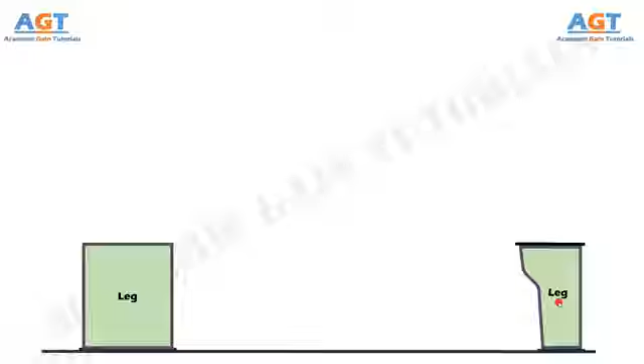This is used in holding the lathe machine and in elevating the lathe bed to a working height. Legs are the most bottom portion and carry the entire load of a lathe machine tool. The legs are firmly secured to the floor by the foundation bolt.

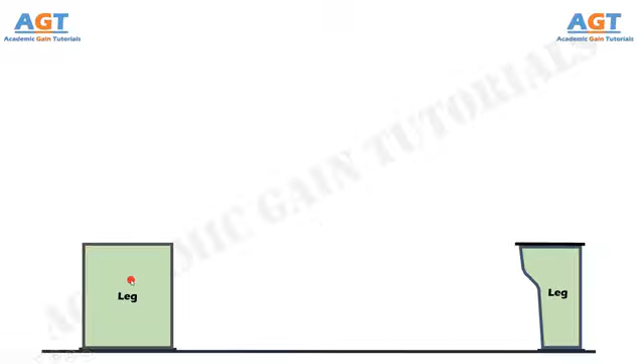The legs or stand of a lathe machine are made of cast iron, through the casting process. Since cast iron has a high shock absorbance and wear resistance capacity, it helps the legs absorb the vibration during work and transfer it to the ground.

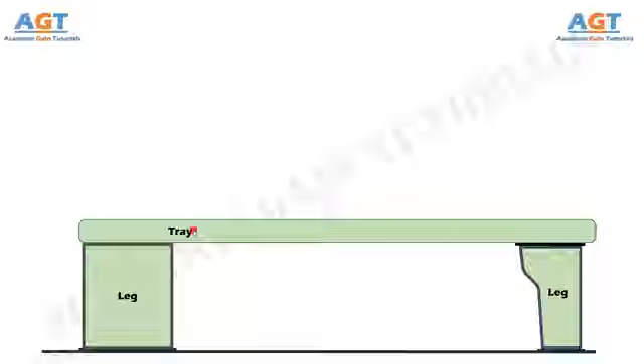Above the legs, there is a tray, also known as chip pan. It is placed at the lower side of the bed, above the leg of the lathe machine. The main function of the chip pan or tray is to collect all hot chips removed from the workpiece during machining operation.

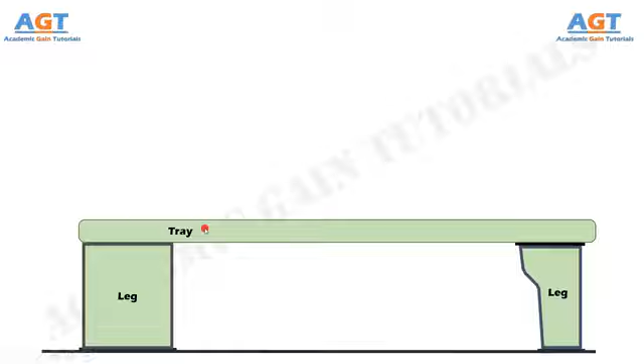Above the tray, there is the bed of the lathe machine, also called the lathe bed. The bed of a lathe machine is the base on which all other parts of the lathe are mounted. It is a massive and rigid single-piece casting made to support other active parts of the lathe machine.

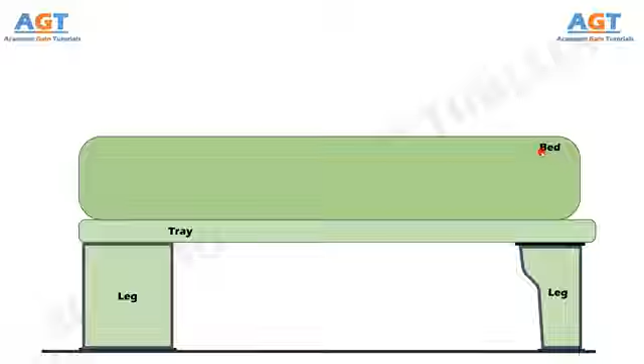The bed is chosen according to lathe machine specification and requirement. It is usually made by single-piece casting of semi-steel or chilled cast iron due to its high compressive strength, shock absorbance, and high lubrication quality. If we are making a larger lathe machine, then 2 or 3 pieces of the bed are cast and then bolted together. For comparatively smaller general-purpose lathes, the lathe bed is made through single-piece casting at a time.

There are guideways on the lathe bed. These guideways take care of the movement of the tailstock and carriage on the bed.

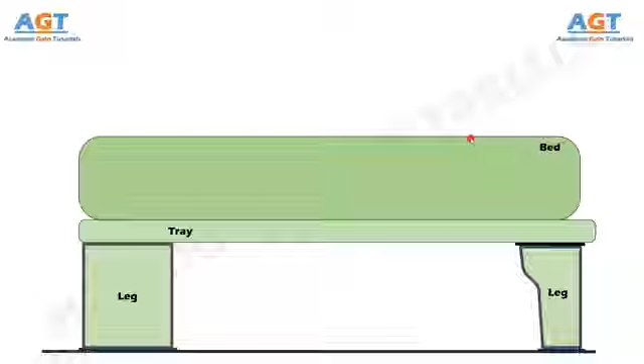On the bed, there is the feed box. This feed box is connected to the lead screw and the feed rod. The lead screw is an externally threaded shaft or rod. It converts rotational motion to linear motion and is used for thread cutting operation in a lathe machine tool, moving the carriage automatically during thread cutting.

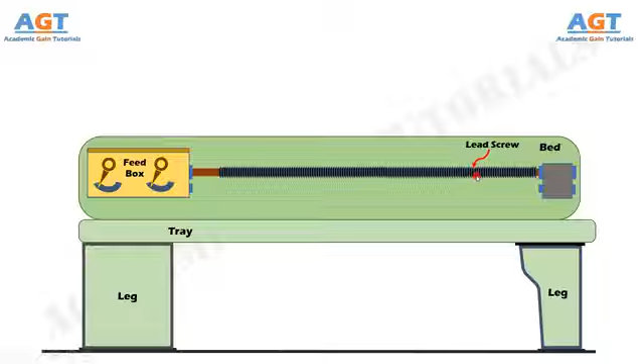The feed rod is a cylindrical rod. It does not have any thread on its external surface. This feed rod is used to move the carriage from the left side to the right side and also from the right side to the left side.

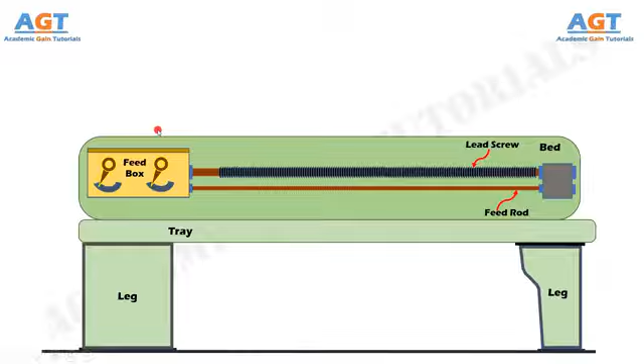Now, on the left end of the bed, the headstock of the lathe machine is located, while on the right side the tailstock is located. The headstock is situated at the left side of the lathe bed and it is the house of the driving mechanism and electrical mechanism of a lathe machine tool. Headstock transmits power from the spindle to the feed rod, lead screw, and thread cutting mechanism.

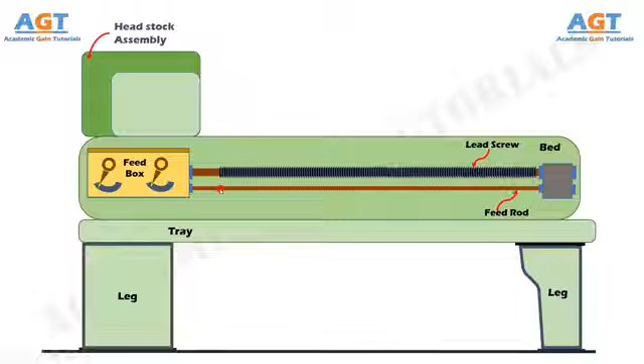There are speed selectors for controlling gear speed. And here we have a lever called the driving clutch, which is used to engage and disengage the spindle from the gear mechanism inside the headstock. In other words, it engages and disengages the motion.

At the starting of the lathe, this driving clutch keeps the motion disengaged from the spindle, and when needed we can use this clutch to engage the spindle with gears for motion, and the spindle starts rotating.

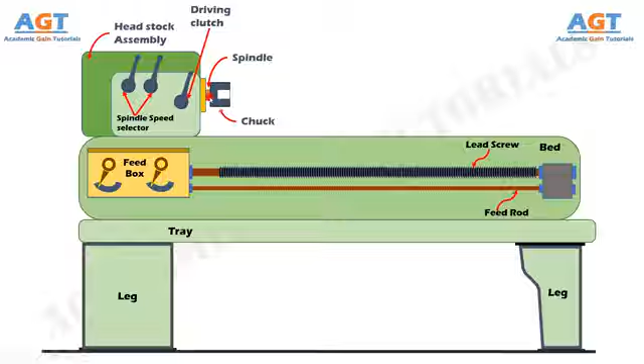Here this is the spindle connected to the headstock. The spindle possesses a live center to which the workpiece can be attached. There is a hole throughout the spindle for handling long bars of workpiece. The spindle is hollow inside and has threads cut on the external surface.

On the other hand, the chuck has threads cut on the internal diameter. So the external thread on the spindle surface and internal thread of the chuck result in coupling or fitting of the chuck with the spindle, just like nut and bolt. After mounting properly, the chuck and the spindle become an assembly.

The chuck here is used to hold the job, or workpiece, firmly during the machining operation. As we have just discussed, it is mounted on the spindle which rotates the chuck and workpiece. Depending on requirements, we usually use 2 types of chuck.

3-jaw chuck, and 4-jaw chuck. The 3-jaw chuck is also called universal chuck, because the three jaws move simultaneously when any one jaw is adjusted. These three-jaw chucks are generally used to hold cylindrical jobs.

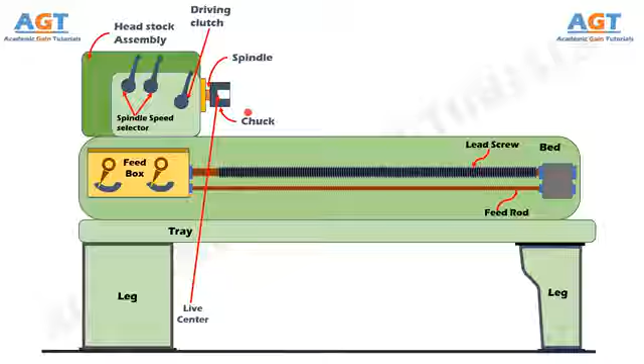The four-jaw chuck is also called independent chuck, because in a four-jaw chuck each stepped jaw is independently operated by a different screw. So the four-jaw chuck can also hold square jobs, rather than cylindrical.

The tailstock is situated on the right side above the lathe bed. It is made out of cast iron. The tailstock moves on the guideways on the bed surface, and it can be moved forward and backward, towards and away from the chuck, according to requirement and job length.

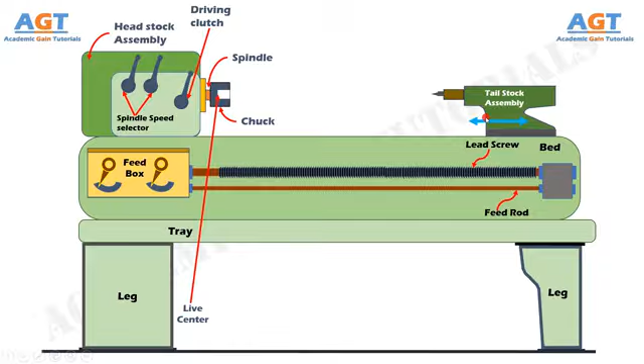The tailstock is used for supporting the long end of the job for holding and minimizes its vibration and sagging, so that the long workpiece does not deflect or bend during the machining operation. It holds the tool for performing different operations like drilling, reaming, tapping, etc., and it is also used for a small amount of taper for a long job by offsetting the tailstock.

This tip portion of the tailstock is also called the dead center, because it just provides support, and no motion is provided to this point. On this side, we provide motion to the spindle, which in turn rotates the chuck and workpiece, so this is called the live center. Both live and dead centers have 60 degree conical points to fit center holes in the circular job, the other end tapering to allow for good fitting into the spindles.

The dead center can be mounted in ball bearing so that it rotates with the job, avoiding friction of the job with the dead center, as it is important to hold heavy jobs.

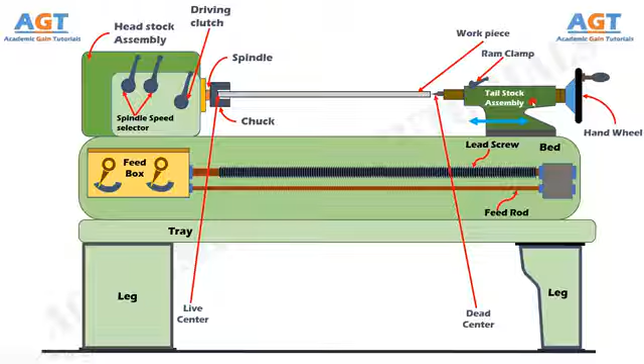In the tailstock assembly we also have the ram clamp and the hand wheel. When we rotate this hand traversing wheel, the dead center moves back and forth, that is, in and out. The ram clamp is used to apply lock on this movement, so it locks the dead center in the tailstock so it does not move.

In addition to this, there is also a tailstock lock, which is used for locking the tailstock firmly in place according to our requirement during machining operation.

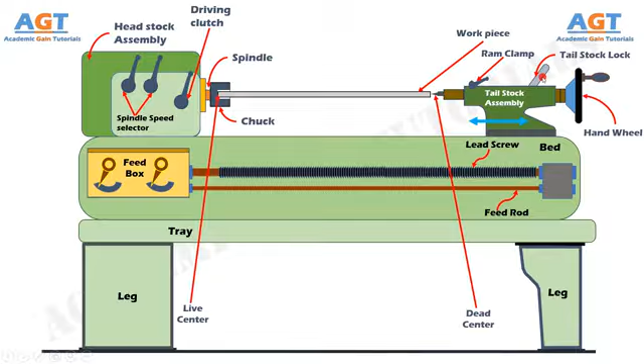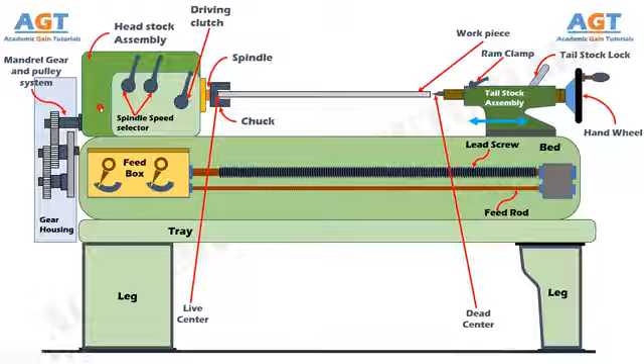On the left of the headstock, there is the main driving pulley and gear system. This driving pulley system is connected to the gearbox inside the headstock, and this driving pulley is connected to the motor through a belt.

Then comes the carriage. The carriage is used for support, guide and feed the tool against the job when the machining is done. The carriage holds, moves and controls the cutting tool, and gives rigid support to the tool during operations.

It transfers power from the feed rod to the cutting tool through apron mechanism for longitudinal and cross feeding. The carriage simplifies the thread cutting operation with the help of the lead screw and half nut mechanism. The carriage is formed of 5 parts: saddle, cross slide, compound rest, tool post, and apron.

On the carriage there is a hand traversing wheel. Using this wheel we can move the carriage left or right, along the feed rod and lead screw. There is also a half nut, or screw cutting engage lever on the carriage.

This half nut is used to connect motion to the carriage automatically. If the half nut lever is engaged, it engages the carriage with the lead screw, which results in automatic movement of the carriage right and left, guided by the threaded lead screw. Thus, the split half nut is used for automatic feed instead of manual feed, which helps us cut thread with accuracy.

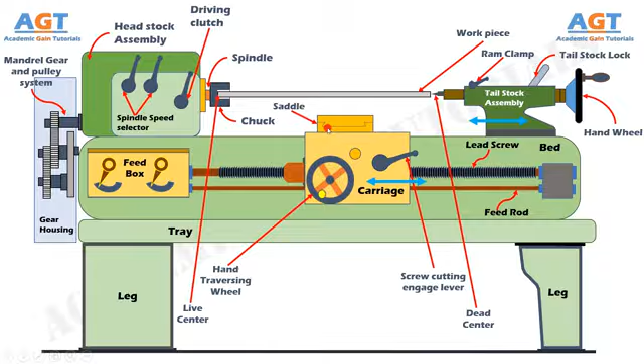Mounted on the carriage there is a saddle. Generally, the saddle is made up of H-shaped casting and it has a V-guide and a flat guide for mounting it on the lathe bed guideways. The cross-slide hand wheel is assembled on the saddle.

The cross-slide generally travels at right angles to the spindle axis. For reference, if the hand traversing wheel moves the carriage left and right, then the cross-slide wheel moves the saddle towards front and back, perpendicular to the bed. Since the cross-slide hand wheel gives this cross or perpendicular movement, it is called cross-slide.

Above the cross-slide and saddle, there is a compound rest mounted. The compound rest supports the tool post and cutting tool in its various positions. It can be swiveled at any desired position in the horizontal plane. Compound rest is necessary for turning angles and boring short tapers, and it can rotate and fix to any desired angle. The compound rest slide is actuated by a screw, which rotates in a nut fixed to the saddle.

Then, above the compound rest, the tool post is mounted. The tool post is an important part of the carriage, which fits in a T-slot in the compound rest and holds the tool holder in place by the tool post screw. It is the topmost portion of the carriage and is used to hold various cutting tools or tool holders. Generally, the single-point cutting tool is mounted on this tool post.

The last part of the carriage is the apron. This whole portion is called the apron, and it is fitted to the saddle. It contains gears and clutches to transmit motion from the feed rod to the carriage, and the half nut which engages with the lead screw during cutting threads. The apron acts as a cover or housing for all the mechanisms inside the carriage.